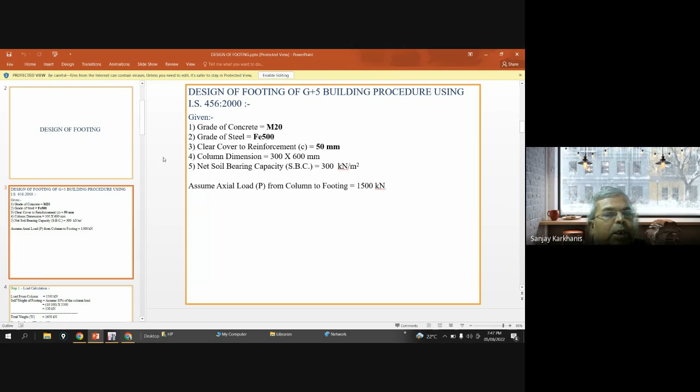So what is given? Given is grade of concrete, grade of steel, clear cover for reinforcement, column dimensions, net soil bearing capacity, and axial load. Now here we are not considering any moment. We are just saying that only axial load is there. Then how can I design it? Clear? So this is data. Now after that, step number one will be calculation of load.

You are given that 1500 kilonewton is the axial load on the column. Then self weight of footing. Now you don't know the size of footing, so you cannot calculate the self weight of footing, even though you know the weight density of concrete. So that's why we are assuming 10% of this axial load. So 10% of 1500 comes out to be 150. So total weight on the footing, including its self weight, will be 1650. Clear? Yes, sir.

Now the footing. Let us see. We are going conceptually. I'm not interested in formulas. Formulas you can see in any book. If you understand the concept, then there are n number of books that will give you formulas. See, this is the load. Let us say that this is including your self weight. Now, if you are having a footing over here, let's say this is your footing.

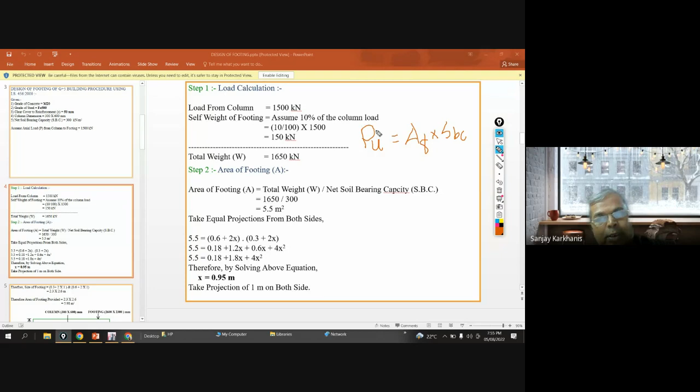This is your kilonewton, is equal to area of footing multiplied by SBC. Yes, sir. Oh sorry, I was thinking something else, so a mistake. Actually see, this is in kilonewton, this is in mm square, and this is in kilonewton per meter square. The equation should have the same unit on both sides. Yes.

So actually see, this was your total force, and this was your upward soil pressure. Okay, so this will be SBC multiplied by area of footing. Then it will be kilonewton, and this will be kilonewton. Then this will be equal. Yes, sir. Yeah, sorry for that, I wrote it wrong.

So finally you are getting area of footing is equal to your working load, or you can say PU by 1.5 divided by SBC, because SBC is always given in working conditions. Okay, so this way you can find out area of footing, right? Yes, sir. Now just again try to see the sketch. See, if you keep drawing the sketch, it becomes easy.

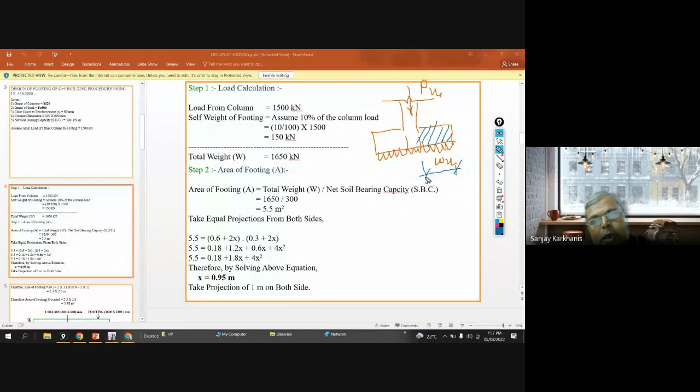So what will be the moment over here? If I call this as X, what will be moment over here? W X square by 2. Right? Yes, sir. So this is the moment that you must resist so that your footing will not bend like this. It bends like that. So that's why moment is calculated by this.

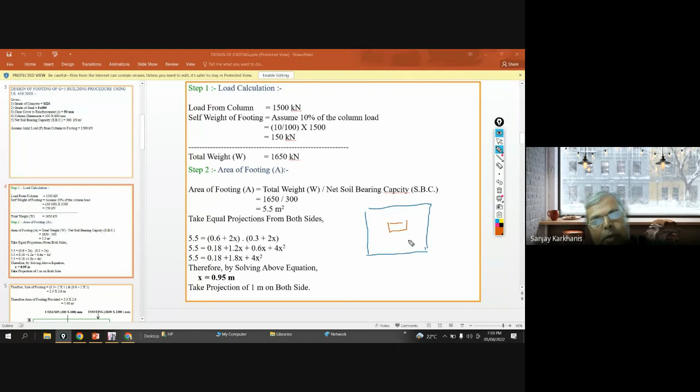Now this X is the projection. But now here you are not in one dimension, you are in two dimension. Let's say this is your footing, and you are having a column like this. And this is your projection, and this is also your projection. Clear? Yes, sir. So this is Y and this is X.

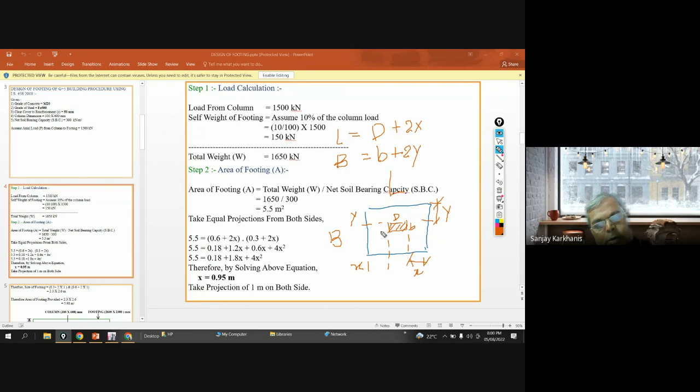So if I call this as L and this as B, let's say this is the column dimension. So my column is this, and this is my b dimension. So I can write L equal to D plus 2X. Right? Yes, sir. Or I can write B equal to B plus 2Y. See, this is my B, Y on this side and Y on this side. So these are the two additional equations which will give you a dimension of L and B.

Then one more thing is that area of footing is equal to length into breadth, L into B or LF into BF. LF for length of footing, BF for width of footing. Clear? Yes, sir. Now, if I want same moment on this side or on this side, I can say that X equal to Y.

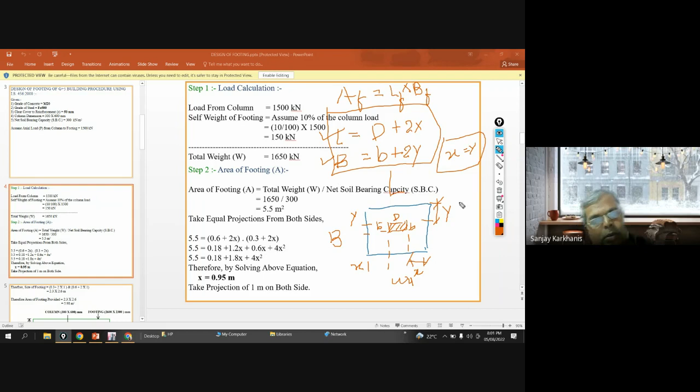Because whatever is W on this side upward, the same will be on this side. So if I call X equal to Y, that is called equal projections of footing in both directions. Clear? Yes, sir. And that is exactly what has been shown over here. You can check that. You will get this PPT, so don't worry about it. I'm not going to invest much more time into that, because you will get all these things for your reference also. You can see, take equal projections on both sides.

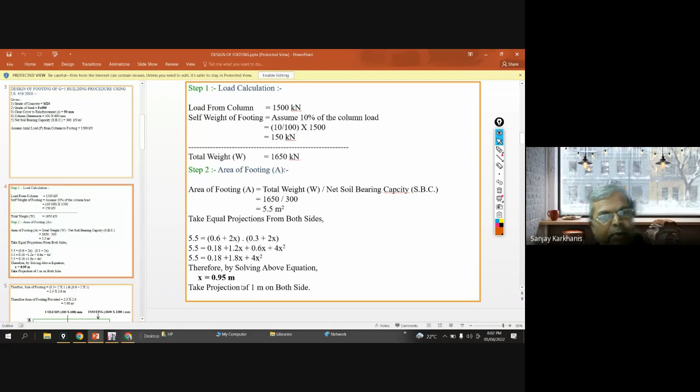So you will find this equation where you will find x equal to 0.95, and then you will get the projection. You can also assume more projection than this. So take a projection of 1 meter on both sides. And you can see the size of footing. This is your width, 0.3 plus 2 into x1. Now x1 we are saying 1 meter, so you are getting 2.3. And here, the longer dimension of column is 600, so 0.6 plus 2 into 1.

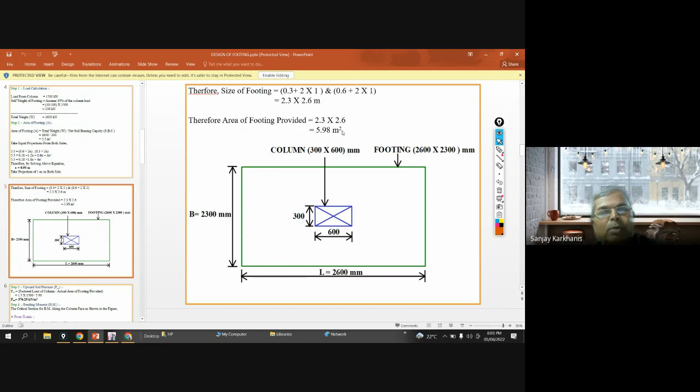So this is how you can find out the area of footing. You can find L and B, multiply them, and see that the area of footing is 5.98. Now this has to be more than the required area of footing. So what required area of footing have you calculated? 5.5. So anything more than that will definitely be safe. Clear? Yes, sir.

Okay, now you can find out upward soil pressure. For SBC, or deciding the area of footing, we are finding area of footing based on our working loads or unfactored loads. But upward soil pressure is to be found out with factored load. So that's why 1.5 multiplied by 1500 divided by 5.98. So upward soil pressure that you are getting is 376.25.

Then you can find out bending moment. So again, whatever x I was saying, here it is called Cx. So you are getting it equal to 1. That is what you have assumed over here. So you can find out Cx, and you can find out MUX, and that is coming out to be 188.125 kilonewton meter. Clear? Yes, sir.

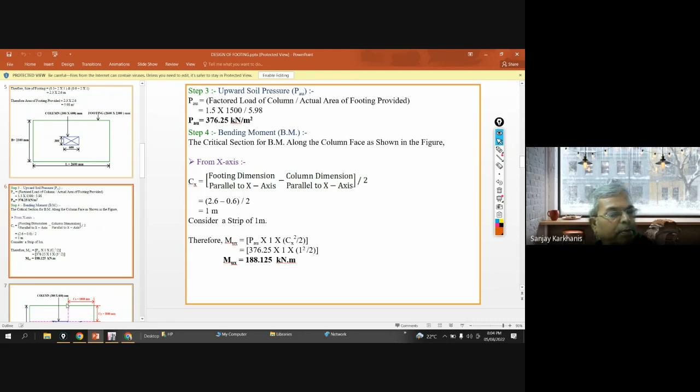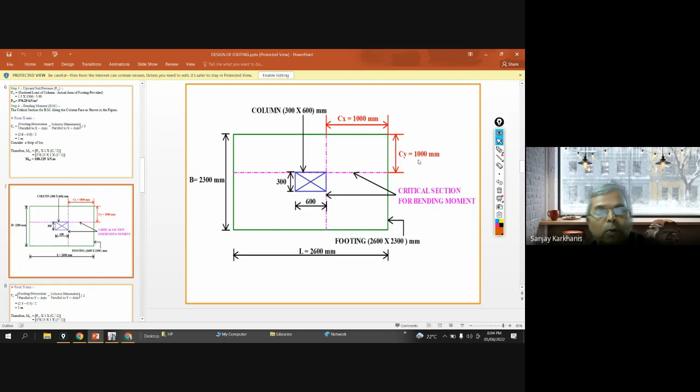Then you can see the sketch, which will give you that idea. So Cx equal to 1000, Cy equal to 1000. That's why you are getting MUY and MUX the same, so reinforcement calculation will be the same. And now you can check Cy. For Cy, again you will get 188, right? Yes, sir. Then you know the RC theory for the required depth of footing.

MU is always equal to RU into BD square. You know this, right? Yes, sir. We have to find the depth.

Right. Now here B we are considering 1000. So D will be the square root of MU upon RU B. Clear? The only thing is, make sure that you are getting the same units. If you are finding MU in kilonewton meter, then you have to convert it to Newton mm, because most of the time RU is in Newton per mm square.

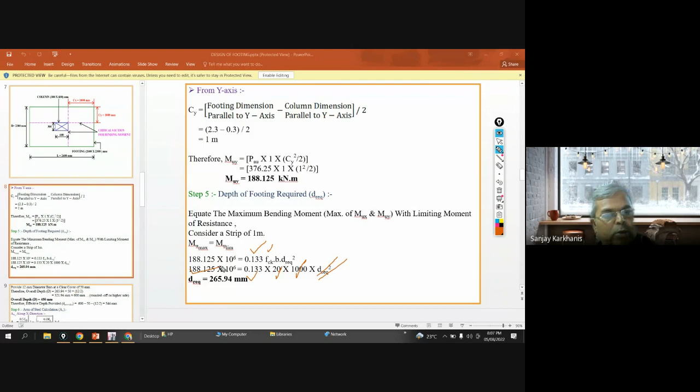You can see this RU is 0.133 FCK. You can go to your basic formulas, where MU equals RU FCK BD square. For Fe 500 it is 0.133. Okay. So based on that, this is the only unknown. Everything else is known. So you can find out D. D is calculated as 265.94.

Now you have to assume some diameter for reinforcement. Design is always assumption and verification, trial and error. So based on judgment, you may go for 10 mm or 12 mm. Here we are going for a 12 mm diameter bar with clear cover equal to 50. Why 50? IS 456 says that for moderate environmental conditions, the bottom of the footing must have a clear cover of 50 mm. So total depth will be 265 plus 50 plus half the diameter, which comes out to be 321. You have to go more than this.

And I will always say that most of the time go for at least two times this. Otherwise, you will have to revise your calculations later on, because you will find something problematic. So whatever required depth is, that's why we are saying assume 600 and then reverse calculation based on D equal to 600. You will find D provided.

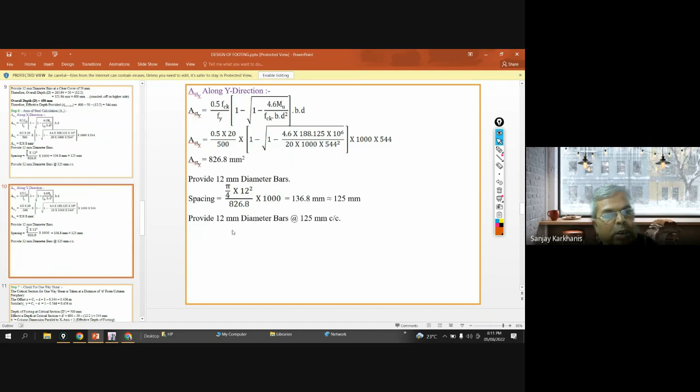Yes. So based on 600, you will find out AST. So AST required is 826. So the area of one bar, you can either calculate like this, or you can say safely 12 mm is equal to 113. Right? So 113 divided by 826.8 into 1000, you will get required spacing. So less than this will be provided. So we are providing 12 mm dia bar at 125 mm center to center. Now this bar will be provided in both the directions, right? Or you can calculate that and you can see the same is coming out, right?

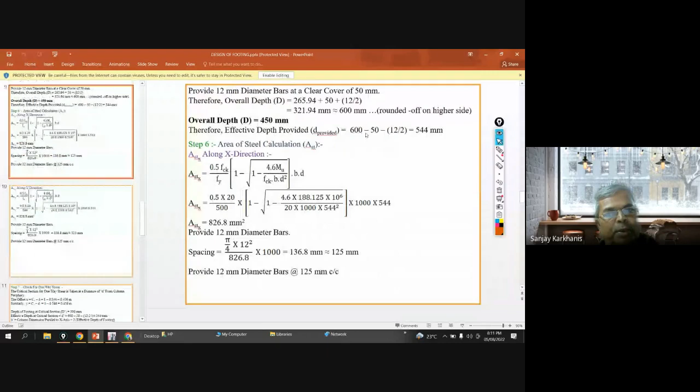Now this check for one-way shear. When I said that you have to go for 2 times, because later on, from strength point of view, your footing depth may be sufficient, but when you go for check for one-way shear. Now I will just explain you what is this one-way shear.

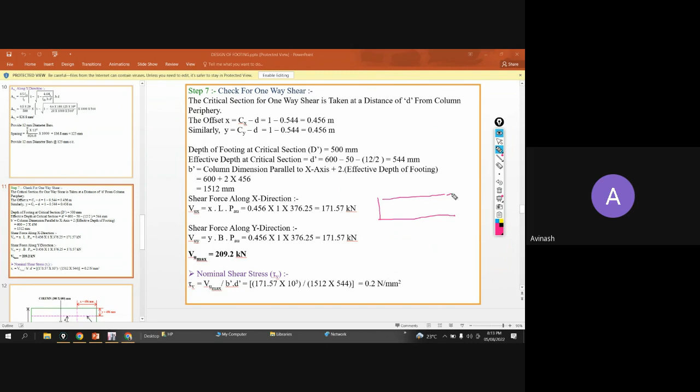So this is called one-way shear, and you can see how that one-way shear is taken care, and then you can see that nominal shear stress. So see the concrete, this is the concrete. Hello, this is the concrete, and in this concrete, you have provided this reinforcement. Okay. Yes, sir. Now this reinforcement is taking care of Mu.

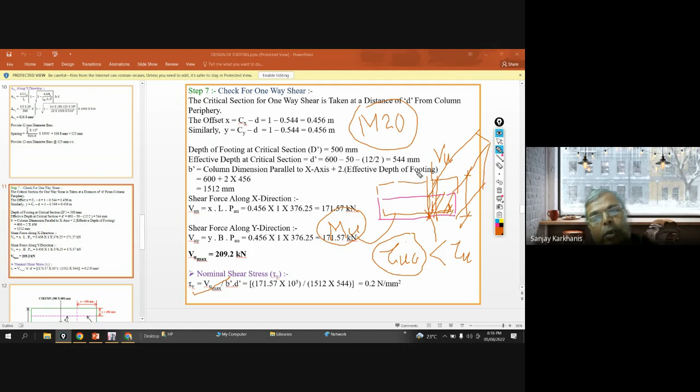Now multiplied by this thickness into the width, width of the footing and thickness of footing. That will give you the stress that is coming due to the load. So this has to be less than the capacity. That is the concept. You can read it, and if you don't understand, then we'll see.

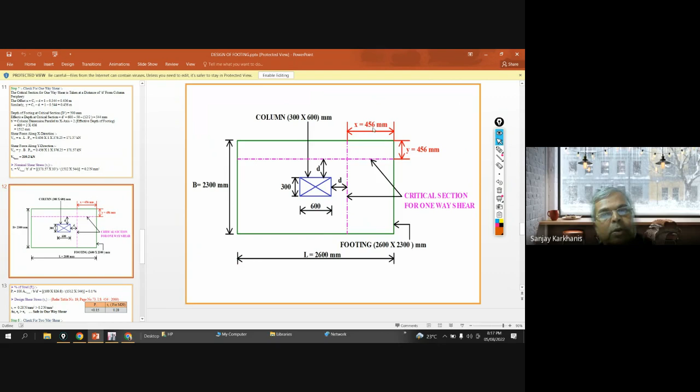Okay, sir. The same concept is explained here. So at a face of D, what is happening? You are getting this from 456, and you can check it over here. Based on that, VU X, shear force in X direction, has been calculated, which is 171, and nominal shear stress, which is 0.2. So if you divide this VU max, then you will get it.

Now you can see the percentage of steel. That is also considered; some stress will be taken care by this. Now go to page number 73, IS 456-2000. You will see that for percentage less than 0.15, tau C is equal to 0.28, which is greater than 0.2, therefore safe in one-way shear. Similarly for two-way shear. What is happening for two-way shear? I will explain that over here.

Now, one-way shear is just like shear in a beam, but two-way shear is because of the two-dimensional form of the footing. See, this is your footing, and this is your column. This is the heavily loaded area due to PU, and this P will be dispersed in this footing. It's something like this, it will be submerged like this.

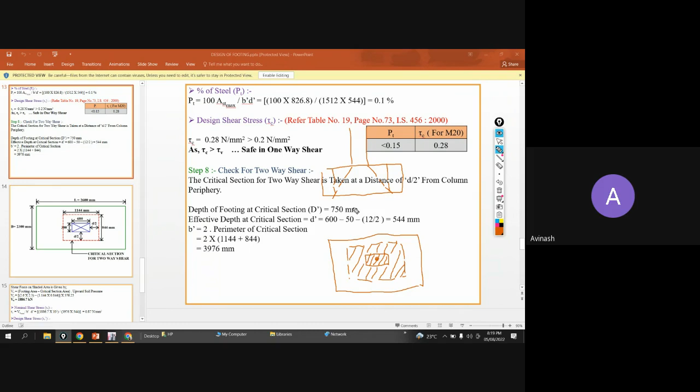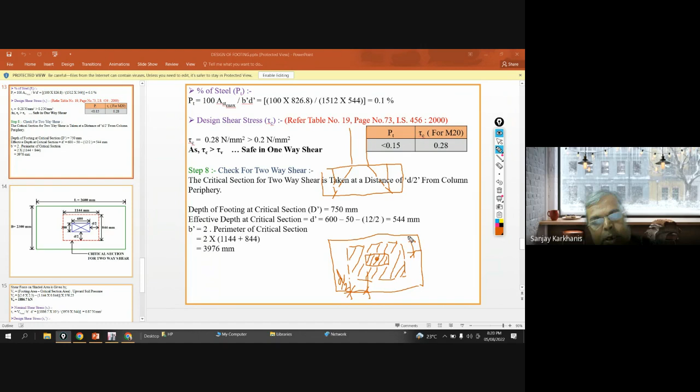And that's why, if you find this area in both lines, this is the area which is resisting your two-way shear. A shear which has a two-way action is called a two-way shear. You can see that, right? Yes, sir. That is calculated at the face of D by 2. You can see this as D by 2. Okay.

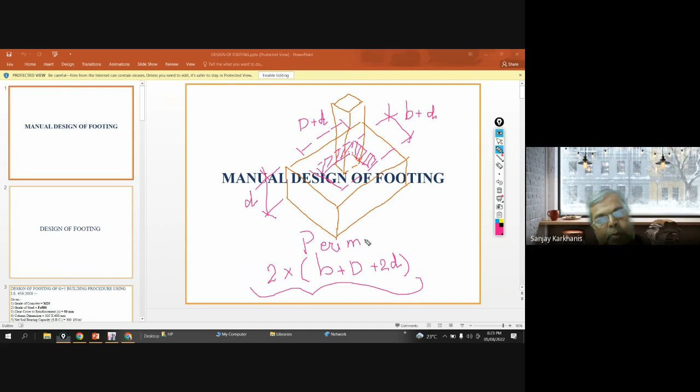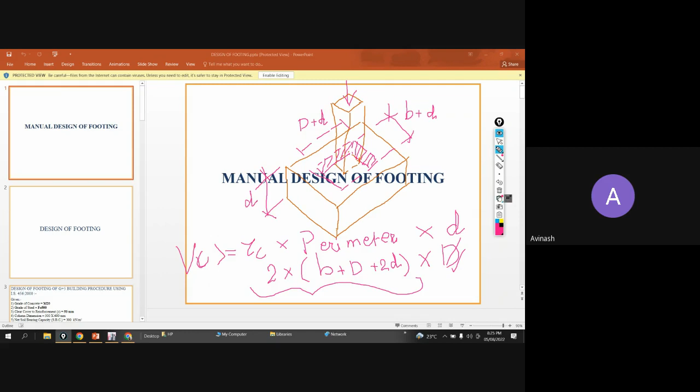Multiplied by depth. This will be the area that is resisting two-way action. That is what we are required to find out. And this area, perimeter multiplied by depth of footing multiplied by tau c, the capacity of concrete, has to be greater than or equal to Vu, which is the force which is driving. Clear? Yes, sir. That's all it is. Now you can go into that calculation.

See, check for two-way shear. Depth of footing at critical section is 750. Effective depth of critical section d is 600 minus 50. This depth of footing is not 750, it is 600. 600 minus 50 minus 12 by 2, 544.

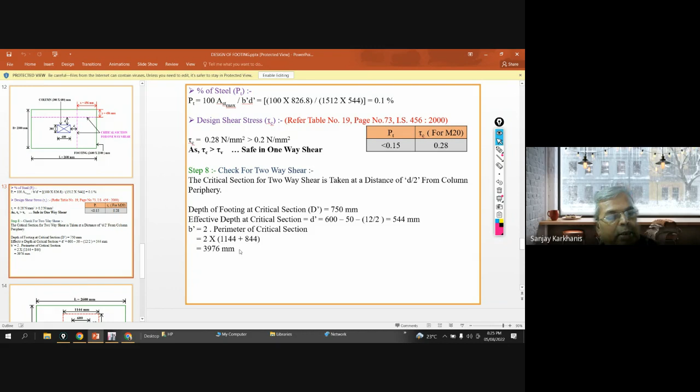So b dash, which is 2 times perimeter of critical section. So this is the critical section that I have calculated. So it is coming out to be 3976. And then you can see that 1144 and 844 multiplied by 2, because 1144 on this side, 1144 on this side, 844 on this side, 844 on this side, multiplied by depth. Clear? Yes, sir.

And now how are you finding Vu? That is shear force on a shaded area, which is given by footing area minus critical section area, multiplied by upward soil pressure. So Vu is equal to area of footing minus, okay, for that also, if you draw, you will see. So this is your area of footing.

And this is your area that is to be deducted. Right? So area of footing minus this area. So that will be the shear acting on the remaining area. Yes, sir. And based on that, you will calculate the nominal shear stress.

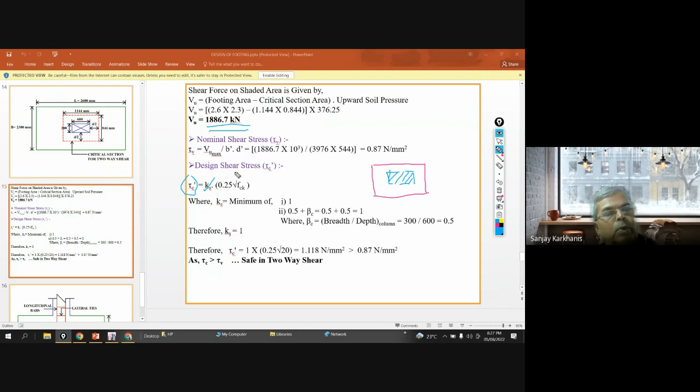And you can see this tau c, capacity of concrete. Again, this is one more factor, where Ks is minimum of 1 plus 0.5 plus βc. All this is given in your 456. You can check it. And then 0.25 root fck is tau c. So tau c is always considered as 0.25 root fck. Ks equal to 1. So you can see the capacity is coming out to be 1.118, and this is coming out to be 0.87.

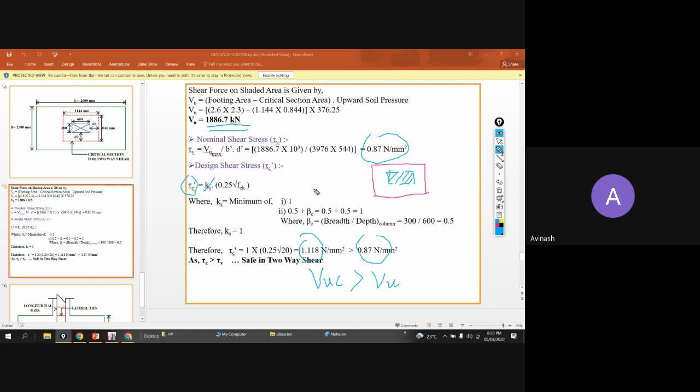So Vuc, that is the capacity, is greater than Vu, or you can say tau uc is greater than tau u. This is in Newton per mm square, and this is in Newton. This is a force quantity. Force is equated with force, and stress is equated with stress. And we are checking that tau uc has to be greater than tau u. That is what is shown over here. Clear? Yes, sir.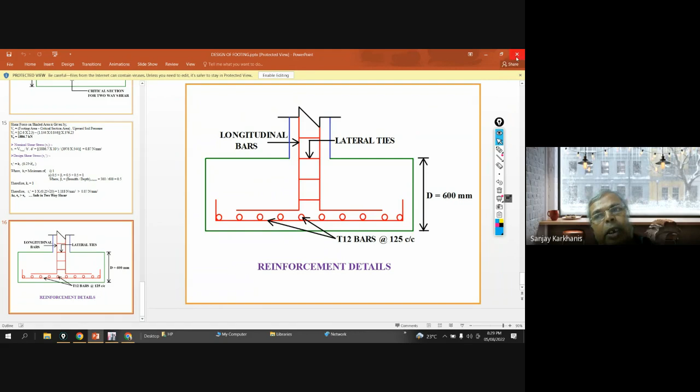Then we do not understand what logic is going on in that. Why we are equating tau uc with respect to tau u, why we are going for Mu, and how we are finding the capacity, you won't know. If you look at it this way, you can go through this. So this is actually a procedure that is used for calculation or design of rectangular footing. Clear? Yes, sir. Now we'll shift to our original problem.

Now suppose I ask you to do the entire calculation for this footing, the procedure is same. And how many columns? 1, 2, 3, 4, 5, 6, 7, 8, 9, 10, 11, 12, 13, 14. To do the calculation for one column, you need at least 10 to 15 minutes. Initially it is more than one hour, but let's say 10 to 15 minutes.

And for this small building, you are having n number of columns. Then how much time will you have to spend? By then your client will have gone to someone else and built the building. Yes, sir. So for that, to save the time, the software is provided.

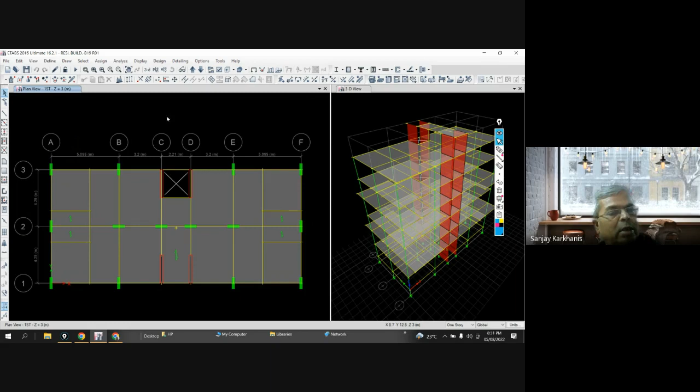Okay, so let us see now. This is the model that we have prepared. In ETABS we have applied all loadings, lateral as well as vertical, etc. And now we have to analyze. But before that analysis, now we are going to see how to import this data into RCDC. So for that, some procedure is important.

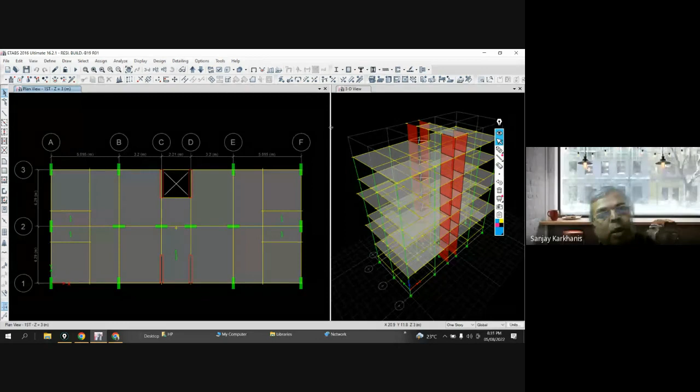Check your model and see that it is not having any errors. And if there are errors, you have to remove them before going to analysis. Okay, there are no errors, so we can go for analysis. So before going to analysis, one more thing is to be done.

If you need this information to be exported to RCDC, you have to make sure that you divide these beams into certain elements and columns also into certain elements. So again, let me show you the technique. See, let's say this is your beam.

Now RCDC needs a result at various locations. Means shear force and bending moment diagram at this point, this point, this point. How many? RCDC has a capacity, or it has been trained that each beam it will divide in 12 equal parts. So how many numbers will be there? 1 to 13. Clear?

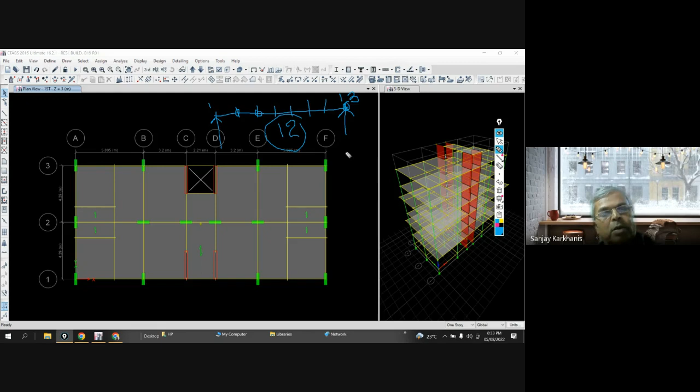Okay. Yes, sir. So these are called as output stations. So output station number 1, output station number 2, output station number 3, 4, 5, and finally it will be output station number 13. Clear? Yes, sir.

Additionally, if you are having a column and you want to design this column in RCDC software, then RCDC needs a result over here, a result over here, and a result over here. So how many stations? 1, 2, 3. Three. Okay. Yes, sir.

Now this is the requirement of RCDC. So you have to put the output results. That means what are the shear force, axial force, bending moment, etc., over here. What is the result over here? What is the result over here? So for every column RCDC needs a result for 3 points, and for beams RCDC needs 13 results. Okay, so that is achieved through providing output stations on beams and columns.

So how we are going to provide the output stations? Very simple. Go to select, and in select go to object type, and in object type go to columns. Okay, clear? Clear, sir. Select, then object type, and under select object type you will go for columns and select them and close. You will see all columns have been selected. Okay.

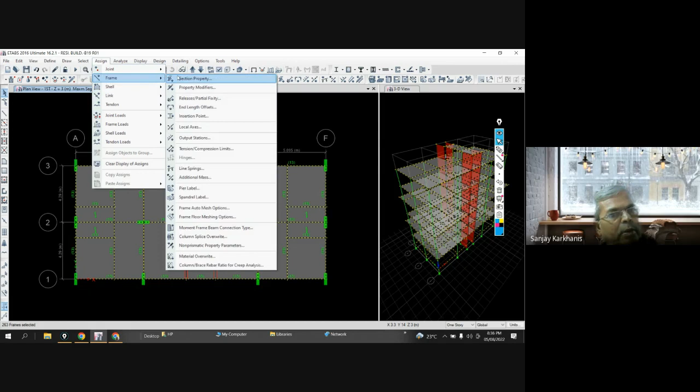Then you have to select the beams. How many beams? All beams. How you will select it? Go to select, and under that go to object type, under that go to beams and select and close. You can see all beams are selected, and then you will go to assign, frame, and output stations, and now here not 3, you have to go for 13. Apply and close. You can see these are the output stations that have been defined. Clear? Clear, sir. Then go to analysis and run analysis.

So 3 stations per column and 13 stations for beams.

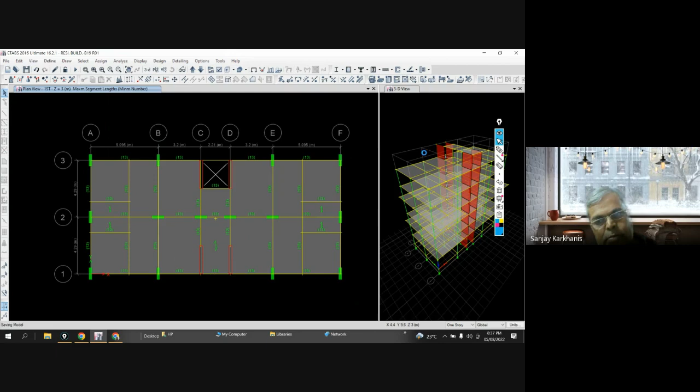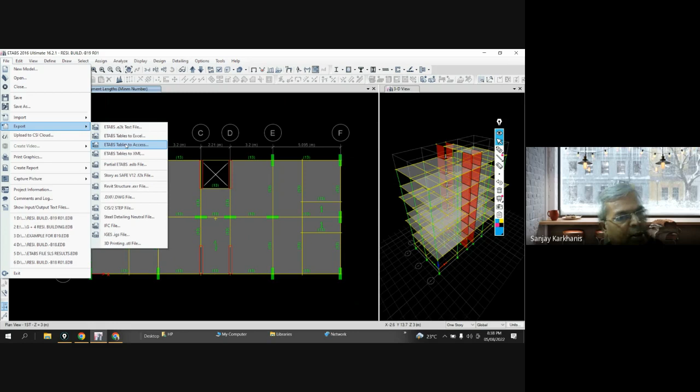So analysis has been carried out. Now I will just go to undeformed shape. I will highlight it over here. Now the analysis file is ready. After that, I will go to file and then I will go to export. Okay. I will go to export and under export, this is ETABS tables to Access. You have to choose this. Which one? ETABS tables to Access.

Then ETABS will create result tables for Access. That is MDB file. It is called MDB file. And in that, you will say model and analysis.

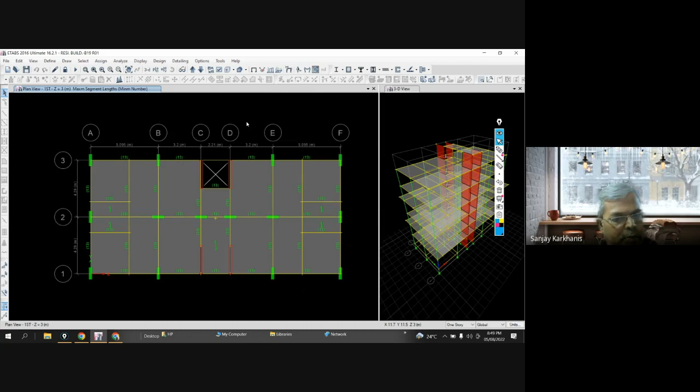Let me see whether the file is created or not. Yes, the file is there. See, this is the file. Residential building B19 R01 created at 5/8/22/849. And you can see Microsoft Access. That is why it is called MDB file, Microsoft Access Database, MDB. Clear?

Okay, now you can see this is your first picture in RCDC, and here you have to name the project. So we'll say residential building. Okay, client, who is the client? Batch number 20. Okay, the engineer, who is the engineer? Me. That's good, everyone will feel yes, I am the engineer.

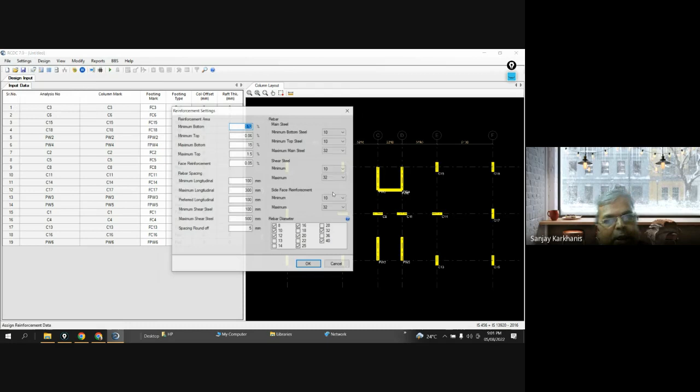So here you must have what are the requirements that have been given in IS 456. So 456 says that minimum bottom reinforcement shall not be less than 0.12%. Okay. Maximum top. So maximum top can be something around that. So minimum top, I will say that 0.02%. So you can say 0.02. Okay. Then maximum bottom.

So bottom में maximum percentage कितना होना चाहिए? So it can be anything. You can say anything, because he will calculate, and then maximum top 1.5. Now he is asking, see, permissible range is from 0.06 to 6, so you can say 4.

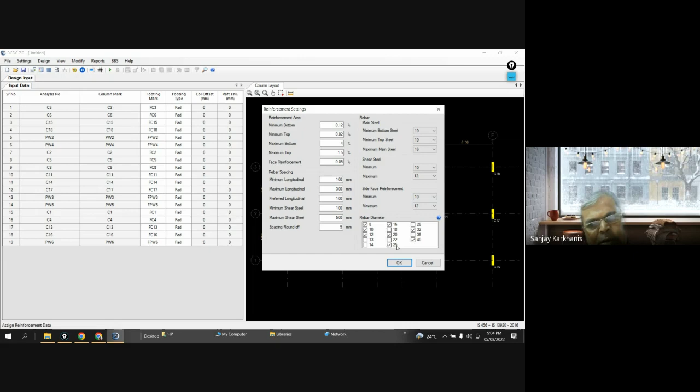Side face reinforcement, साइड फेस का reinforcement आपको कौन सा चाहिए? 8, 10, you can go for 10. Maximum you will say that not more than 12. And this is 8, 10, 12, 16, 25, 32. These are the rebar diameters available. Click OK.

क्यों नहीं ले रहा? ओके, थोड़ा समय ले रहा है. Okay, then settings, detailing and drawing settings. Okay, this RCDC gives you detailing also. That is the best part of this RCDC. It will give you RC drawings also.

Bottom steel vertical leg, आपको fixed distance चाहिए या factor से चाहिए? You can go for that. Normally we'll say that for this type of building you don't need vertical bent up more than 150, but sometimes if the depth of footing is around 1000 etc., 150 is not sufficient. So we say that in terms of factor d/2 or d/3, whatever you feel. Right now I am choosing this, but you can choose anything.

Software has that facility. Then top steel vertical leg. Top steel का vertical leg का distance कितना है? This also I will go for 150, or you can go for the factored one as per your choice. Then overlap हमको चाहिए नहीं, so we are not going for that. Then face reinforcement, side face reinforcement का lap कितना चाहिए? You can say 300.

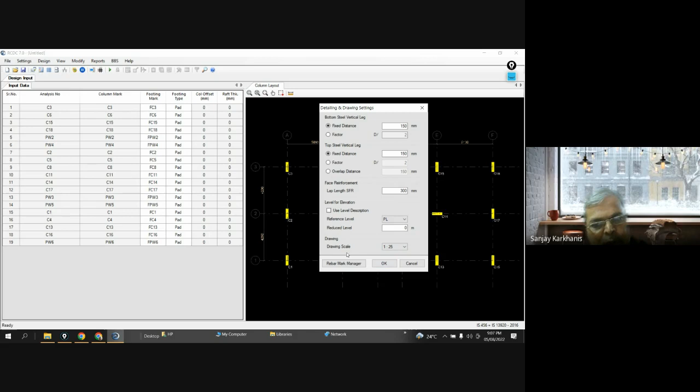Settings क्या हुआ? Crack width करना ही नहीं है. Crack width कहाँ पे है? In water retaining structures you will have to go for crack width settings. It is just following the codal provisions as per IS 456, and this is the basic load cases.

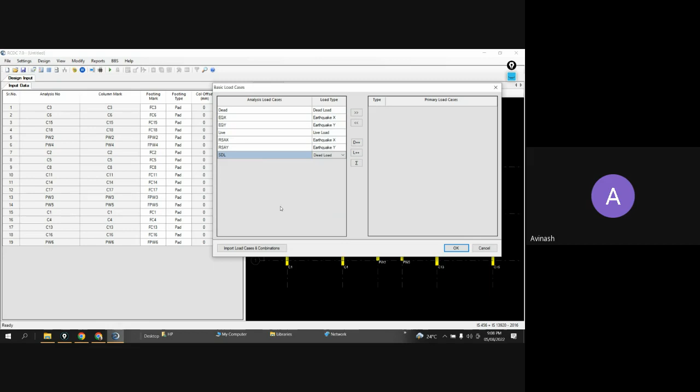Either you can go for dead or you can go for others, but I will prefer dead. Okay, sir. And this is the analysis load cases, load type, etc. Primary load cases. So I will set it to that. Okay, one by one जाना पड़ेगा.

Now this, for designing, you can say add from analysis. Do you want to remove? Okay, duplicates have to be removed. Okay. Now all these combinations have been taken as per our codal provision based on whatever primary load cases you are given. Okay.

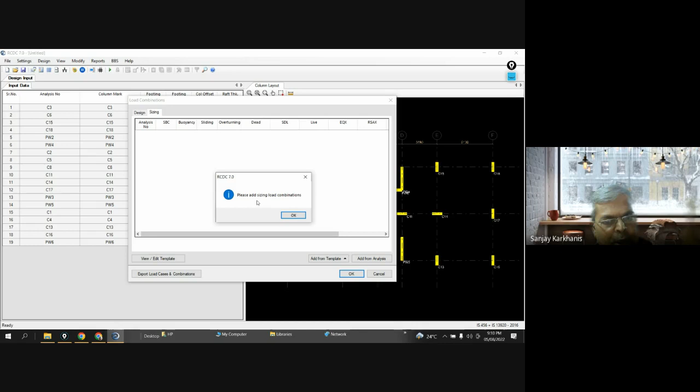Okay, please add sizing load combinations. Yes, it has to be added for sizing too. Add from analysis. And say yes. So now sizing is considered with the help of working load. So that is asked by that. Then you can go to settings and setting is complete.

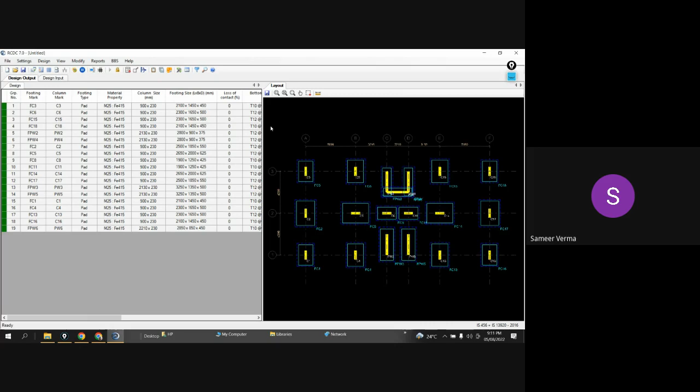No. See, I have taken all primary load cases here. But whatever you say, that is right. Normally I take only gravity loads here. I don't go for any lateral loads.

See what is happening. For this footing, the columns you have given the results. There might be moment, and because of that your reinforcement may be increased or your size may be increased. So that is checked over here.

But yes, definitely below ground, you cannot say that earthquake is acting because below ground, though there is a vibration, it is a rigid vibration. And as a structure engineer, we are not worried about any rigid motion. We are always worried when there is a differential settlement or when there is differential deformation.

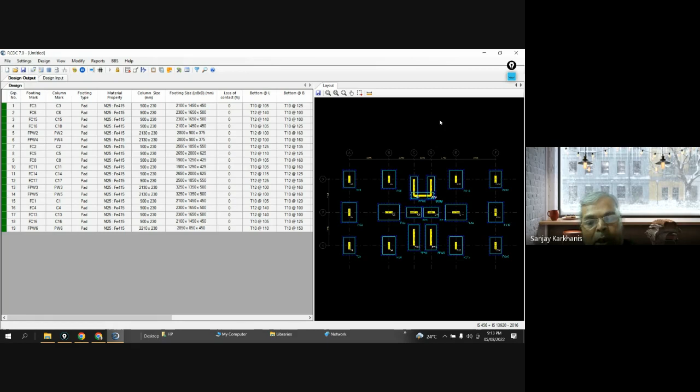Yes. See, stresses will come in any element only when it will deform. See, if it is moving, then there will be no stresses. Just imagine that you are going somewhere by your car, and your car is moving, but the car will not find any stresses on the body. It will find stresses only when it gets deformed.

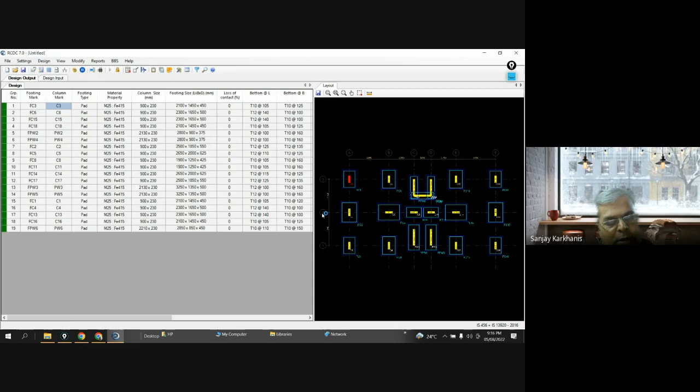Then you can go for reports. If you go to reports and click on it, it will ask you what report you want. Are you interested in design summary? Okay, you can click on that, and you will get the design summary. So for every footing, you will get a summary like this. Footing number FC3, column is C3, pad, M25. This is the required reinforcement: top and bottom reinforcement, parallel to length and parallel to width. So this is the summary.

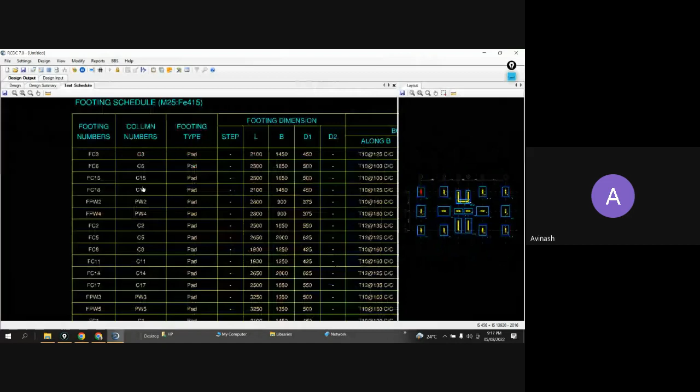देखो, footing schedule, FC3, C3, pad. Then there are no steps because we have not asked him to go for steps. So you can see L, B. So length of the footing, width of the footing, D1 and D2. D2 will come in picture when you are going for step footing. By the way, step footing पता है?

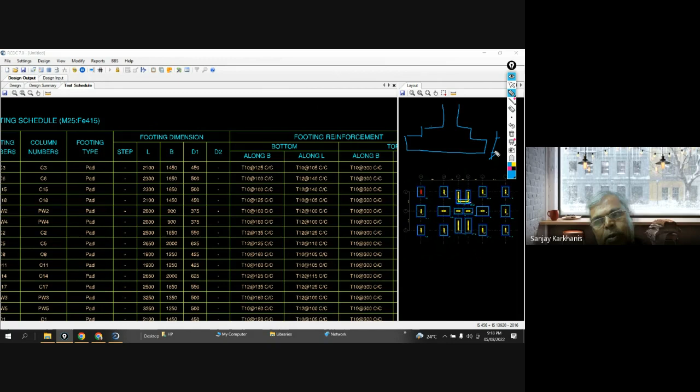Hello. Yes sir. कुछ लोग ऐसा footing कर दे. Yes sir. So in that case, you will say this is D1 and this is D2. Okay. Right now we are not asking him for this type of footing. So, but you can ask.

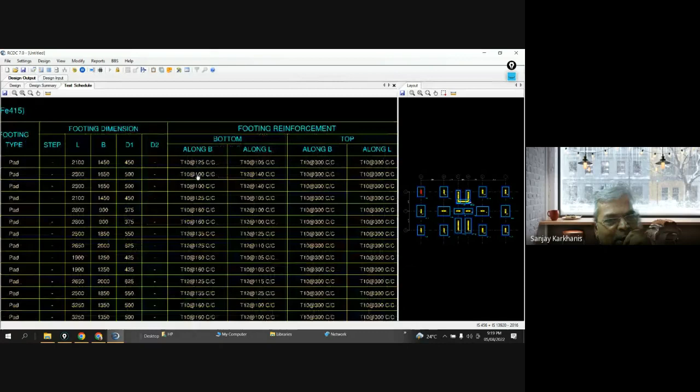Footing reinforcement. So along B, along L. So this is about top, this is about top, and this is about bottom. So you can get in vertical format. अब कुछ लोग बोलते हैं नहीं सर हमको वो वर्टिकल में अच्छा नहीं लगता, हमको हॉरिजॉन्टल में चाहिए. So you can ask him and he will give you in horizontal format. वैसा लो. ठीक है. जी सर. ओके.

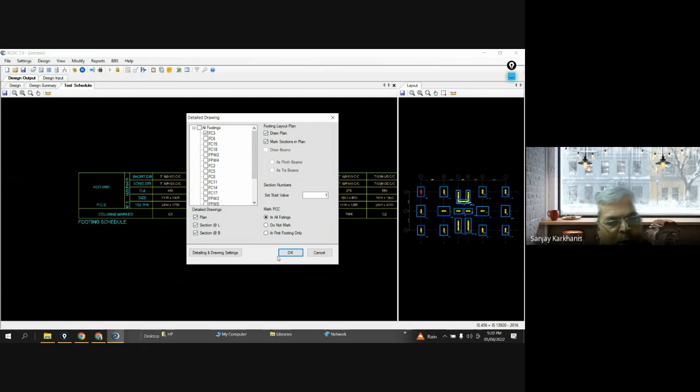And this will be for all footings. You can see detailed drawing for this footing.

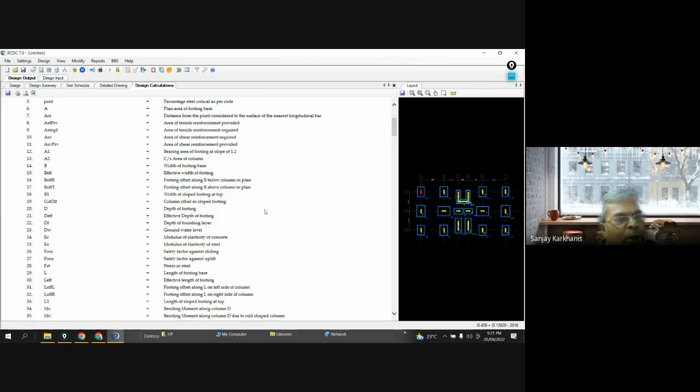Okay, now this is very interesting, and I like this facility because this is the facility only in RCDC, and actually I like this only for this. And for newcomers, जिनको design of footing पता नहीं है ना, and code

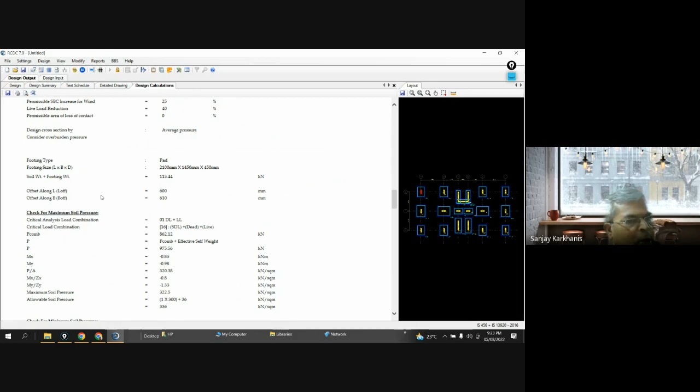You can check it. Soil weight plus footing weight, it is calculated like this. So offset along L, offset along B. Check for maximum soil pressure. वो कौन से क्राइटेरिया को उसने मैक्सिमम सॉइल प्रेशर काउंट किया है, कैसे किया है? So critical load combination is 16, that is seismic load plus dead load plus live load. Then MX, MY, P by A, M by ZX, M by ZY, all that is given. Then check for minimum soil pressure.

So minimum soil pressure में उसने वो seismic weight criteria check किया है. And there's design for bending, bottom reinforcement along length, top reinforcement. You can check this.

Yes. अब इतना डिटेल तो कोई नहीं देगा आपको। बस आपको पढ़ना है। और इससे जो चीजें आपको नहीं समझी, कि लोड ट्रांसफर चेक हो, तो यहाँ पे देख लो, and then with reference to the books that you are using, you can improve your understanding. So this design calculation is the very best part for this.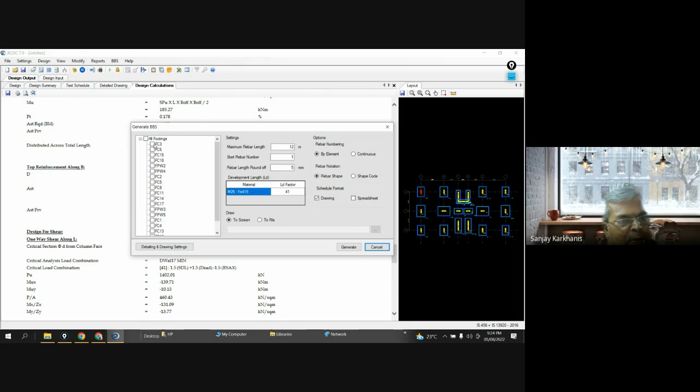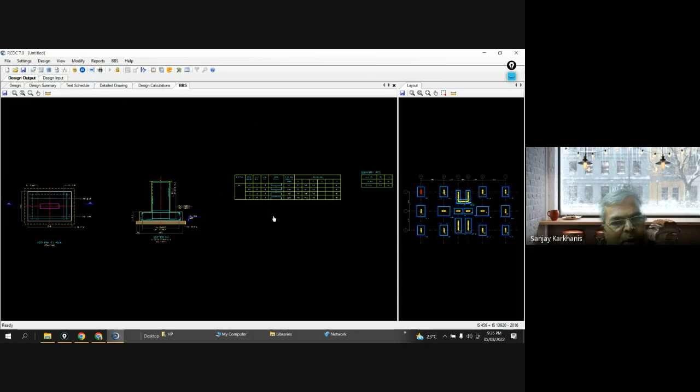Mostly that's why people all over the world are using this, only for this. The whole work in the office

gets done. So in the summary for FC3, the bar diameter is 10, so you can see this, and weight in kg and weight in this LGT. I don't know what this LGT is. I don't pay much attention to it. So this is the weight that is required for this. Yeah, longitudinal, and I will have to see that 88 and 55.

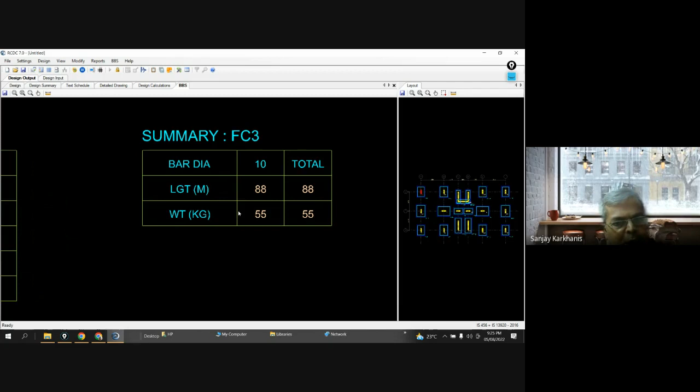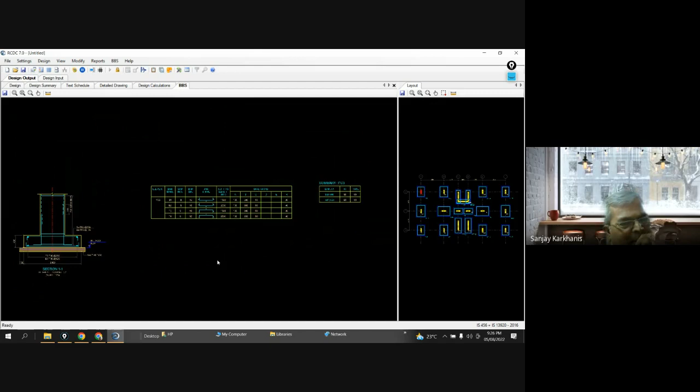So bar mark, bar numbers, bar dia, bar shape, cutting length, A, B, C. So A is this much, B is this much, C is this much. Together it is 1588. Yes sir. And this R is that curvature, the bending curvature here, right? Yes sir. That is okay. You can check all that.

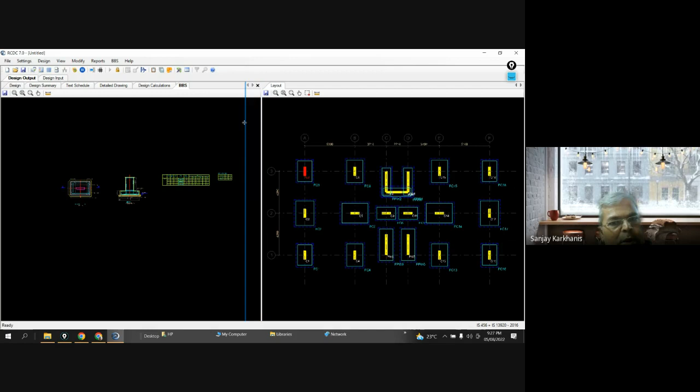So this is how you can carry out the footing. But I will say that use this for your understanding purpose. The problem with today's generation is that they have handed it to software, so they are not going manually. That's why today I was not supposed to go for manual conceptual understanding, but I don't like that. Until you understand, there is no benefit. Yes, sir.

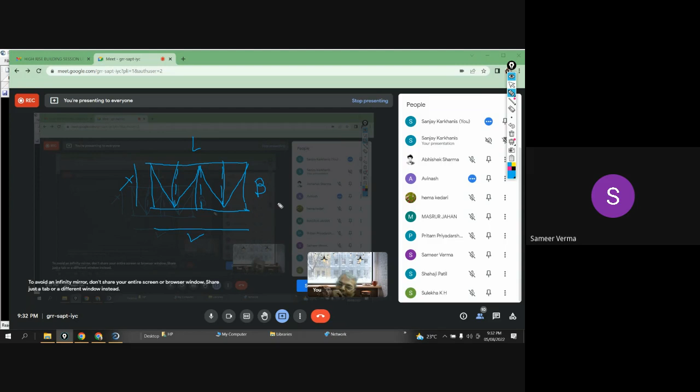I thought maybe he didn't understand this. He will say trusses will be provided like this. But what did he do? He provided a truss like this, in the plan itself. So these are the things, and that's why I am really worried, and I hope you people don't do something like this. Okay? Yes, sir.